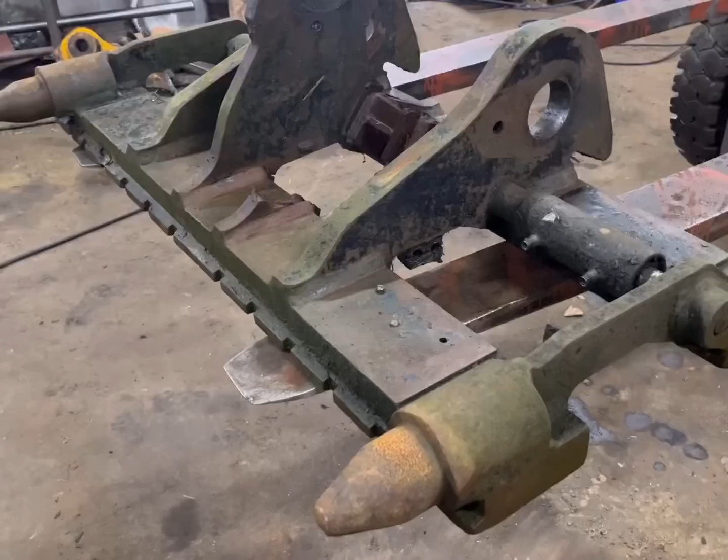Right, we're going to do a video on repairing this JCB pin and cone headstock. It's had the usual problems where the middle plates are broken out, so we're going to cut them off and what remains of that one, plasma some new ones out, weld them on and then line bore them through.

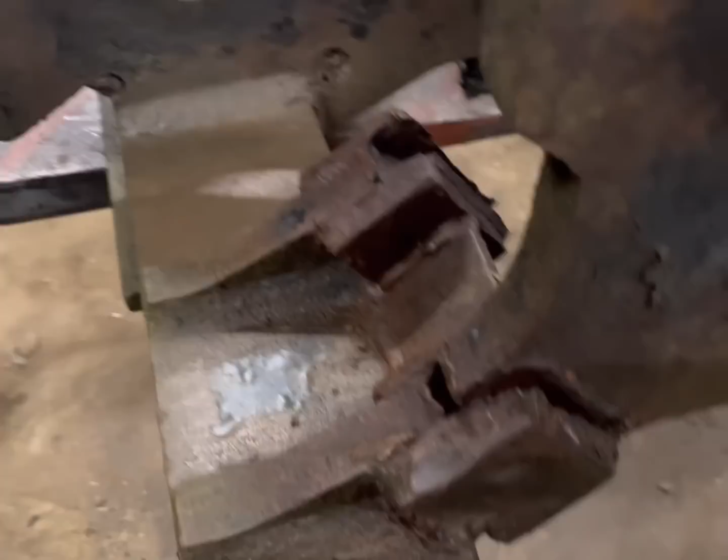So we'll start off by gouging the remains of them off. Someone's had a go at repairing it before, but not much success. So we'll gouge all that off, get it back down to smooth bare metal and then go from there. Right, I'm ready to gouge these off using 8mm carbon rods.

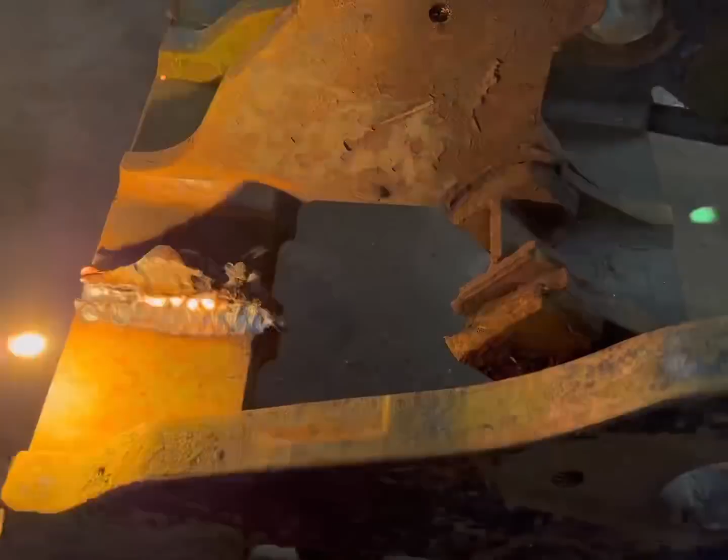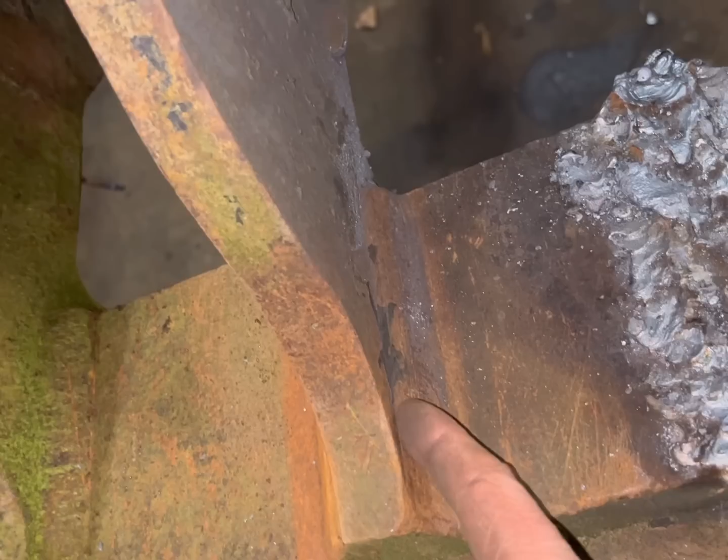Got that off. Because of how much weld prep these have on them, you have to dig in quite deep to find the separation line, so it is quite difficult. You just have to gouge plenty out.

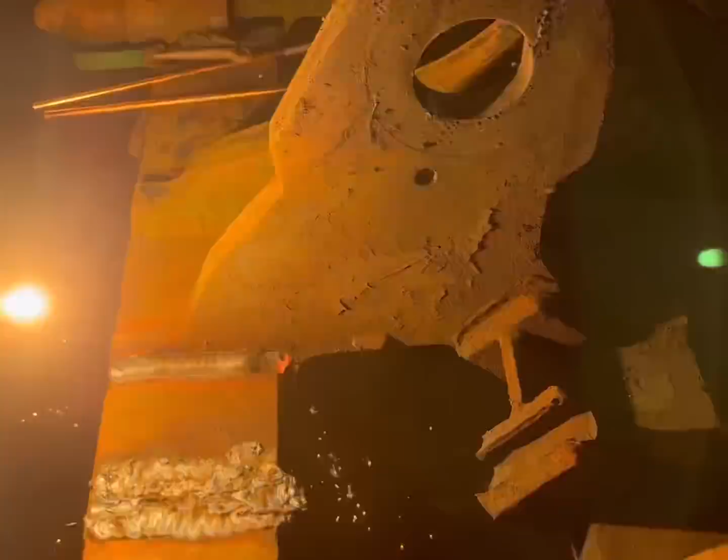You can see in there, found the separation mark now, so gouged enough out onto that side now.

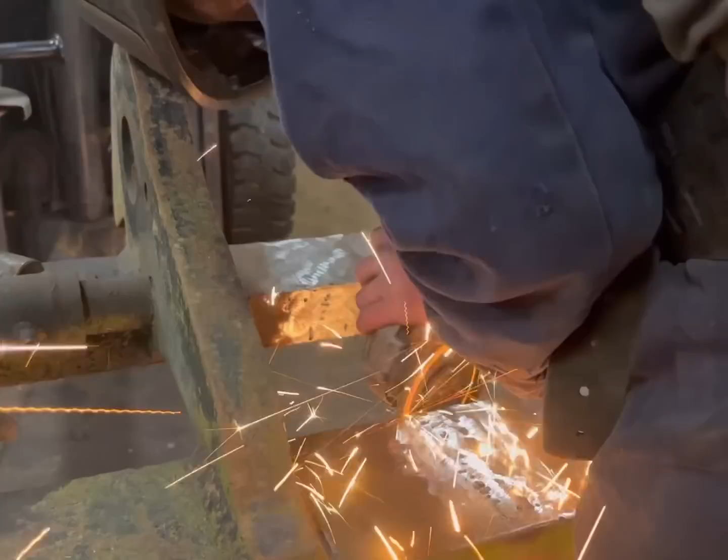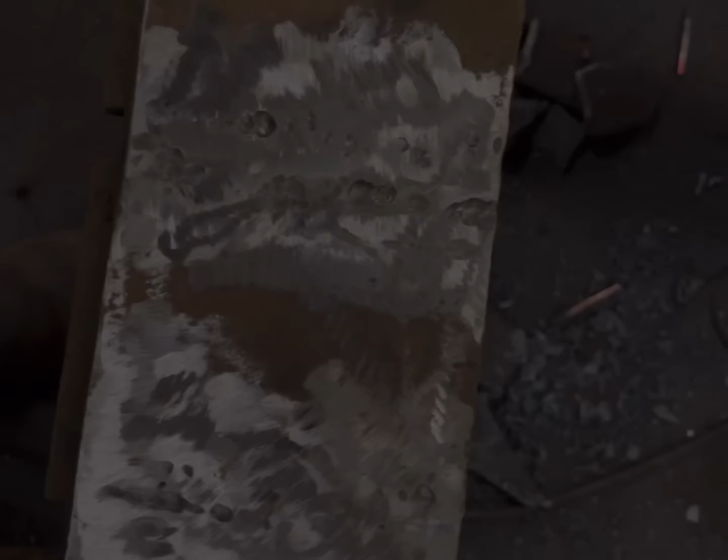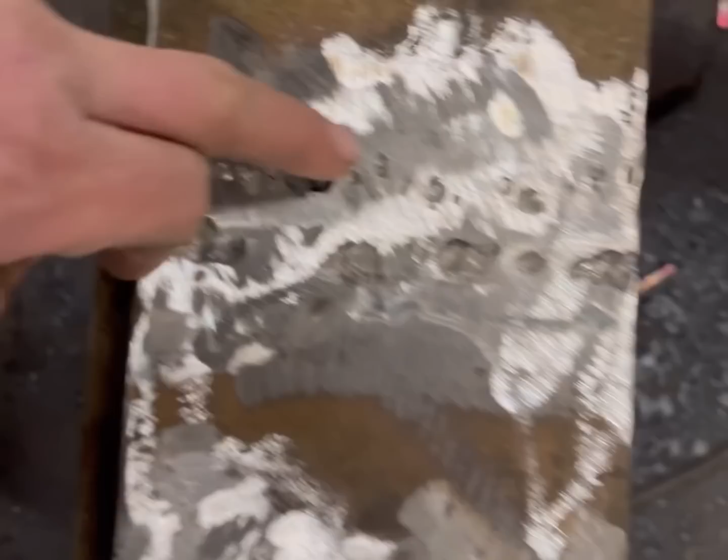I've got all them gouged off and cleaned up. What I've noticed, there's a crack. I'm not sure where that is as well. There and there. And there as well. So I'll get crack detection spray, spray it on, see what it says. Well, that's definitely a crack, is that? I think we'll have to gouge it out and then weld them back up again.

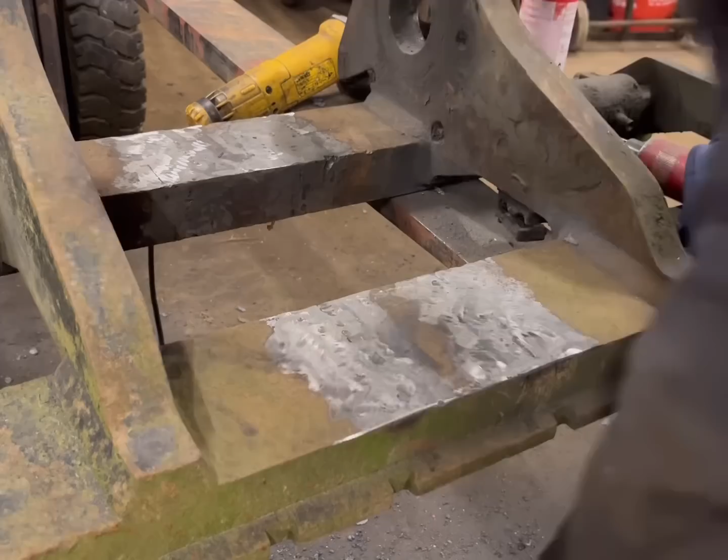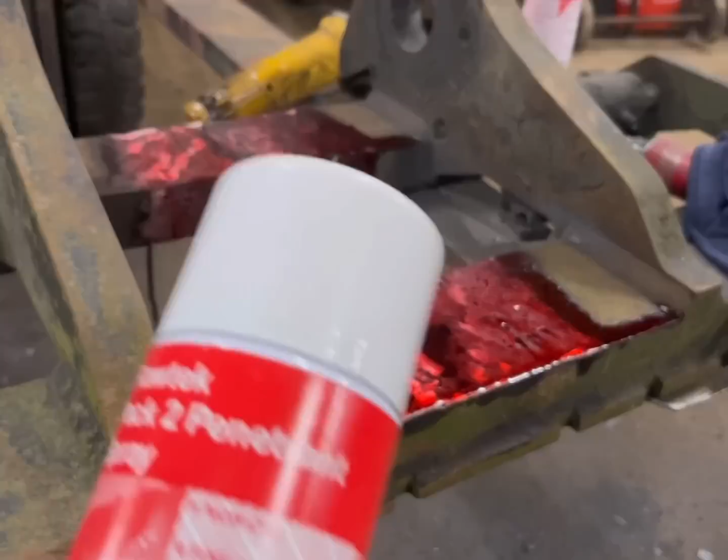Spray the penetrant on. Just have to give it 10 minutes now to seep in, and then we'll see if there's any cracks. Yeah, we've done the crack detection spray, and there's a crack there, some on there, so we'll have to gouge them out and then can weld them back up.

I've got it welded down to my bench. I've got it pre-stressed with a bit of plate under the middle, so when I weld it, it doesn't pull back and bow. Just wants to preheat now, and then I'll weld them cracks up.

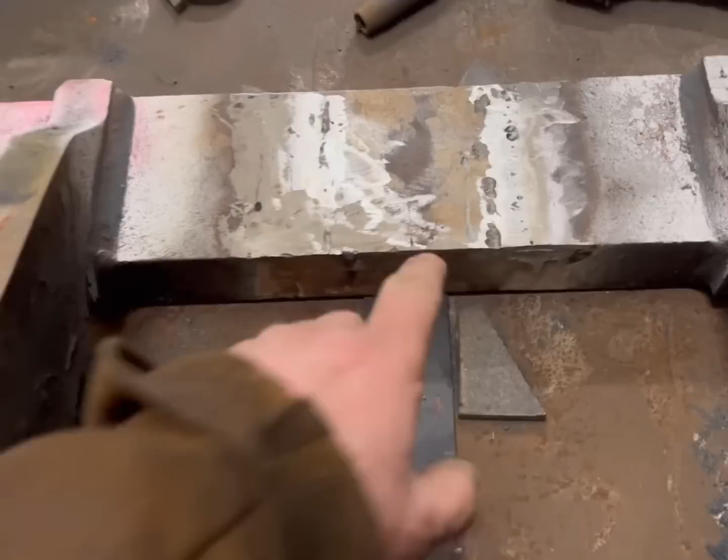I've got the cracks filled in. A few odd points where I've gouged in a bit too much with the gouger, but they'll fill in with weld when I weld the plates on. So I'll plasma the plates out now. Here's one I made earlier, as I say. I'm just going to alter this one a bit.

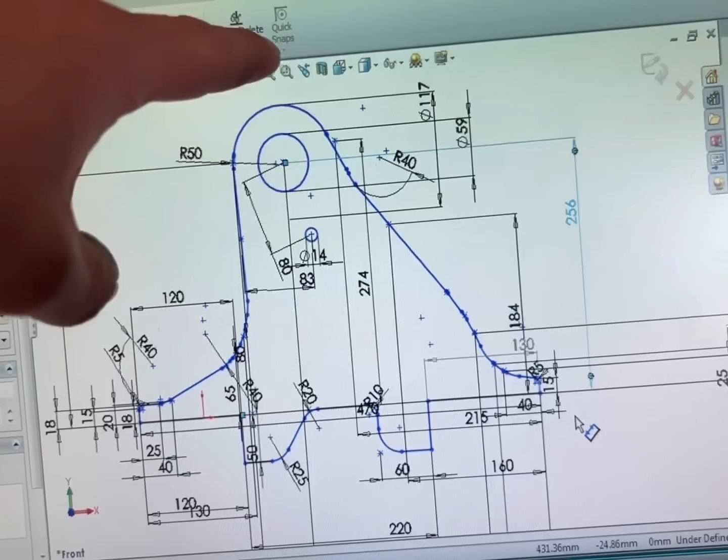For some reason, on the older JCBs, they have more metal around here, so I'm just going to alter this and give it a bigger radius around there, because they often tear out across there. And then I'm also going to alter this bottom. I'm going to make that straight across there, and then put a little hole in there for the pipes, because they rip out across there. So put a bit more extra metal in across the bottom.

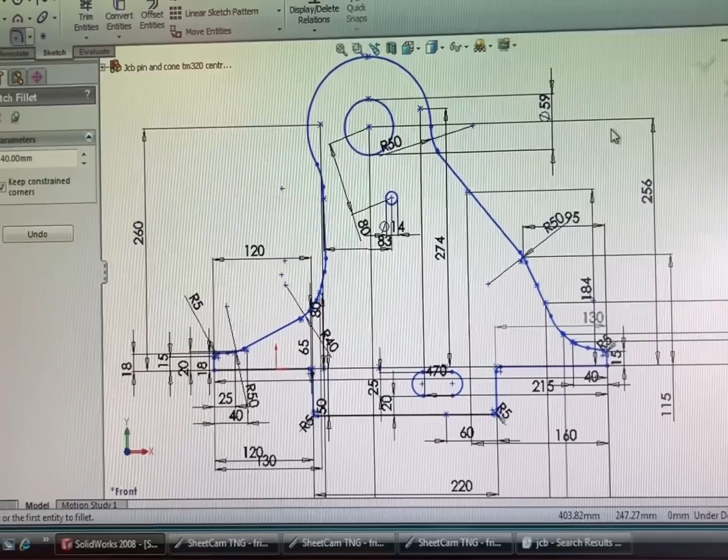That should help. Right, so I've altered that now. See, there's more metal around there than at the bottom there. Made it straight across there and put a hole for the pipes to go through. So I'll save that as a DXF, and then we'll open it in SheetCam, ready for the plasma.

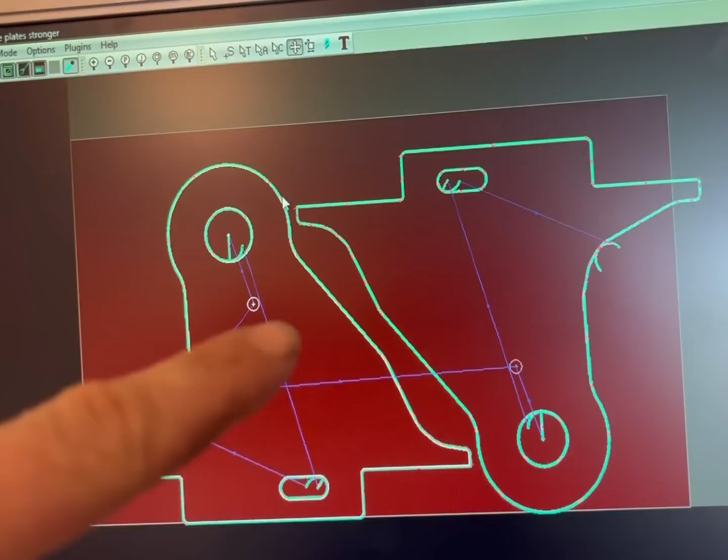Right, I've got that nested in SheetCam. Got a nice lead in and lead out on the holes. We'll have to pre-drill these because it won't pierce 25mm. And then that one is a bolt hole that needs drilling and tapping, so it's just going to put a pierce mark there just to mark the hole centres. So I'll save that onto USB stick, and then we'll go and get them cut out.

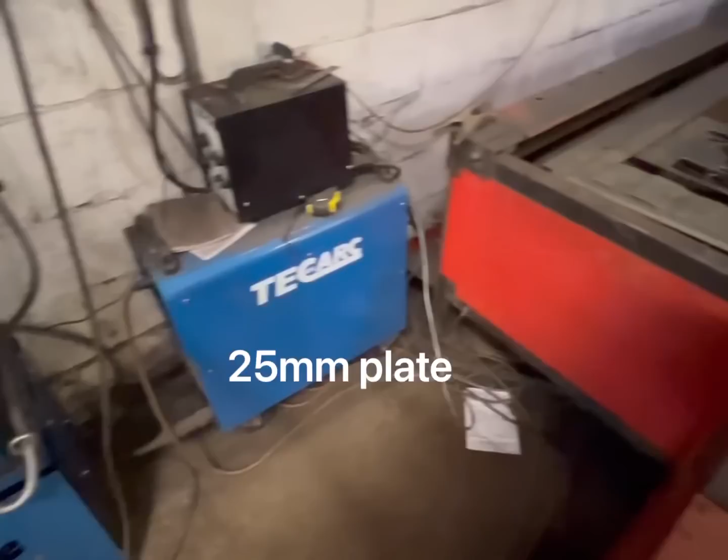I got my file loaded in. It's an old Burny 3 controller with an AlphaTech USB adapter. Got my plate on there ready. There's some I've cut out previously. And I'm using a Tecarc 95 amp plasma.

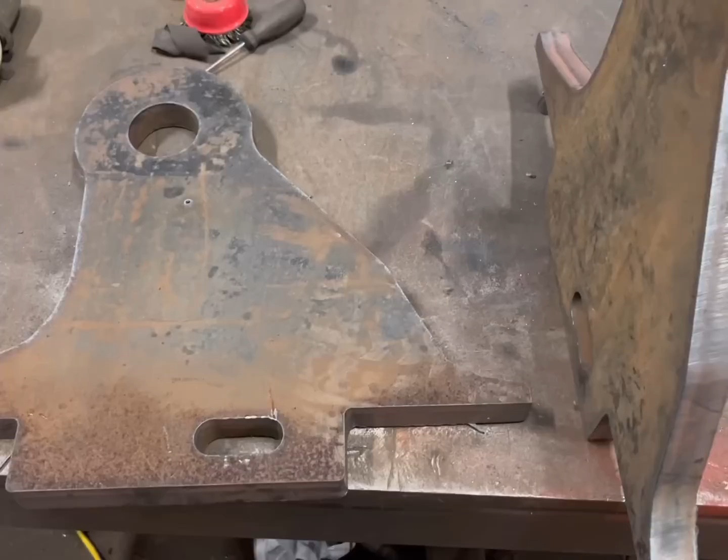So that's them cut out. Just want cleaning up a bit with the grinder. Reasonable cut quality, just a bit of slag to knock off. And then there's them holes there to drill, tap M16.

They also need weld prepping on them edges there, just that one, same on the other side. Want V-ing right back out. That's why it takes so much cutting off, because there's quite a lump of weld in there. So yeah, we'll do that.

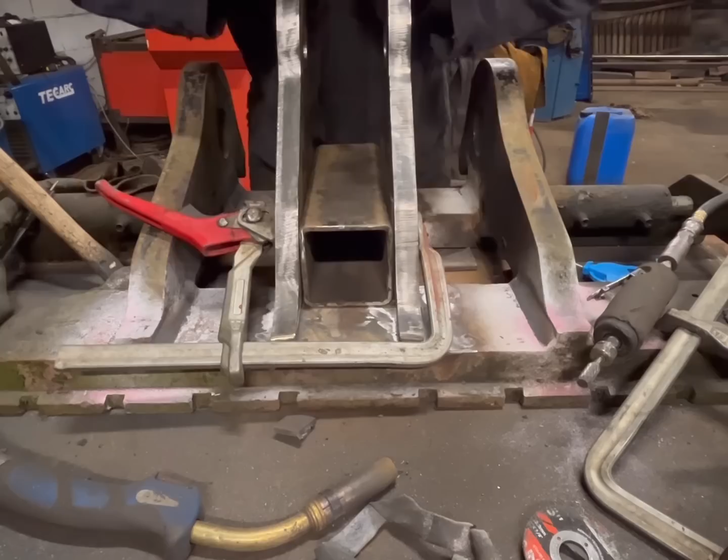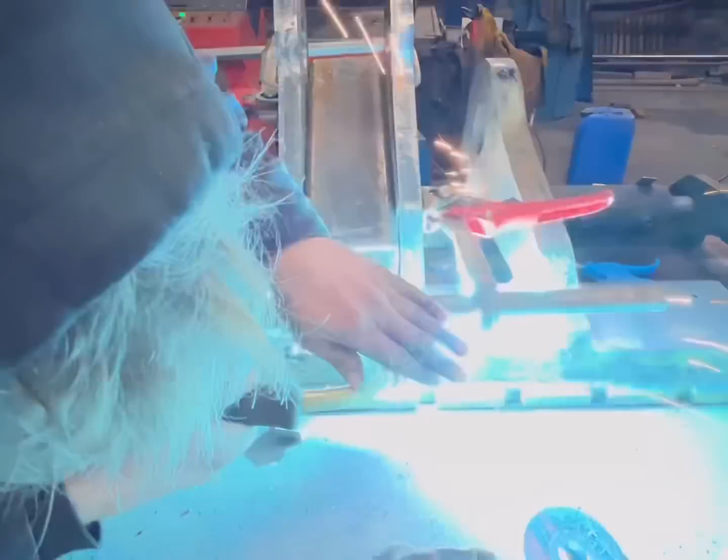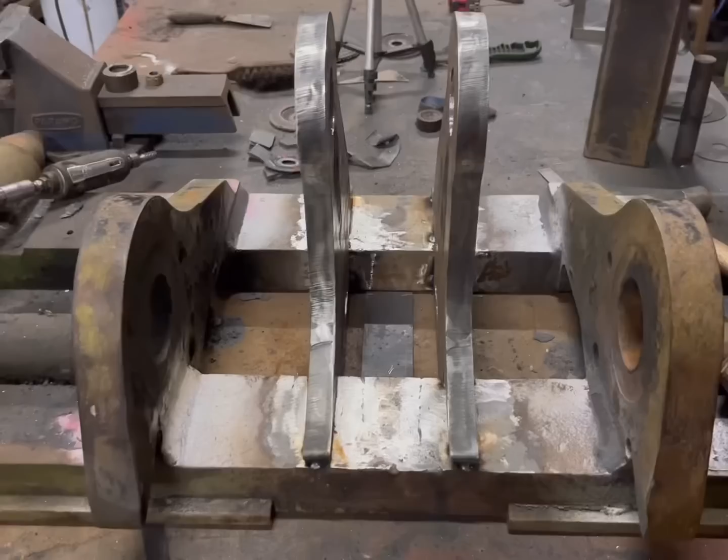I've got them tacked in there now. I purposely tacked them in a little bit lent over like that because I know when I uncut it from the bench it'll bow back a little bit, but that'll just nip that in. And I'm gonna cut a plate and press a plate to go in there, up there, across there and down there as well, so that'll

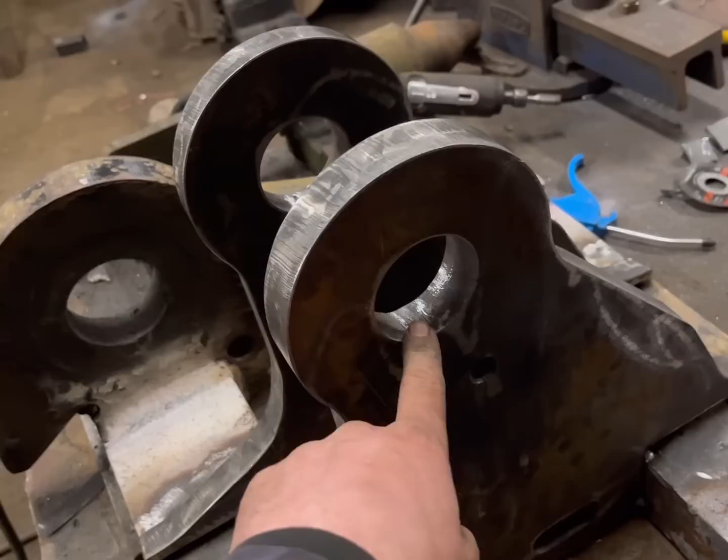keep the gap right. And I just need to tack a bit across there, stop it pulling in, and then we can weld it up more. Preheat it and then weld it up, and then after we've got it all welded up we can line bar that hole through. Purposely done that where that's 59mm, where the pin that goes through is 65mm, so there's plenty there to line bar out.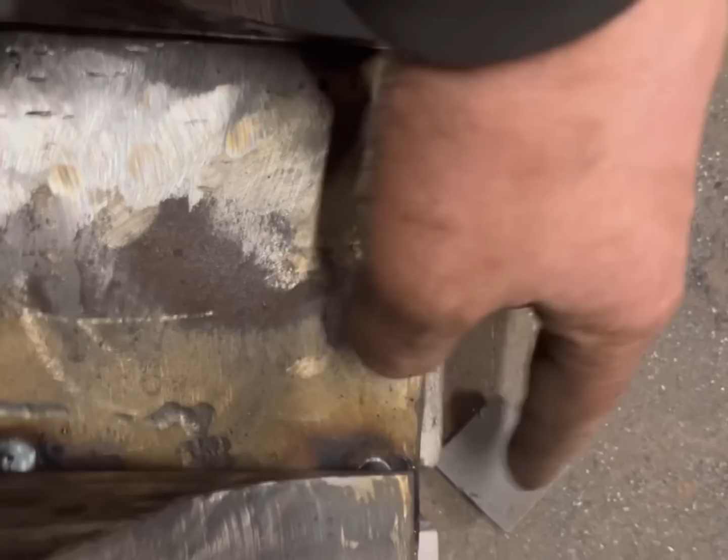Just going to tack some runoff plates on there as well, there and there, and then I've got somewhere to start on with the weld rather than starting on an edge.

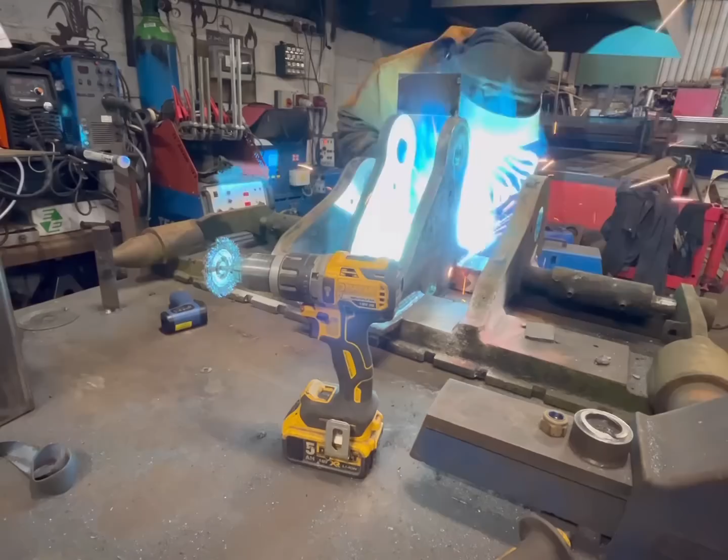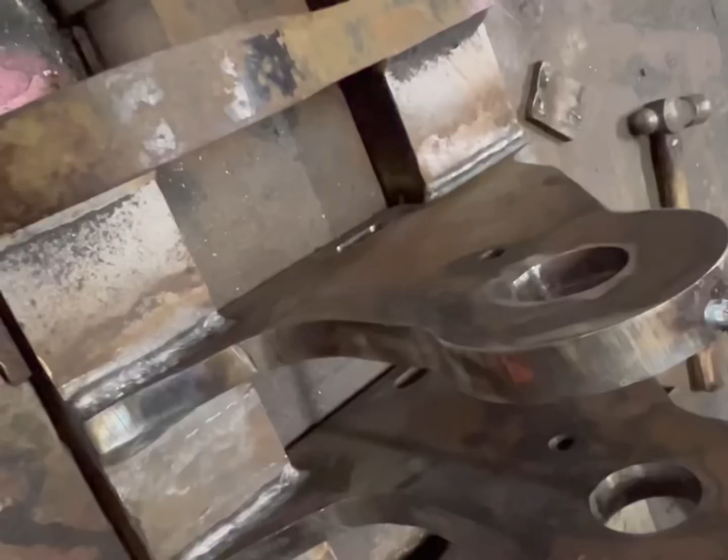Right, they're all welded on. Not my best looking welds, but they're good and strong. Burnt in nice. We'll just wait for it to cool down and then we'll take it off the bench. And we've got them welds to do, and then them welds to do. We'll have to have it right way up to do them, and then upside down to do them.

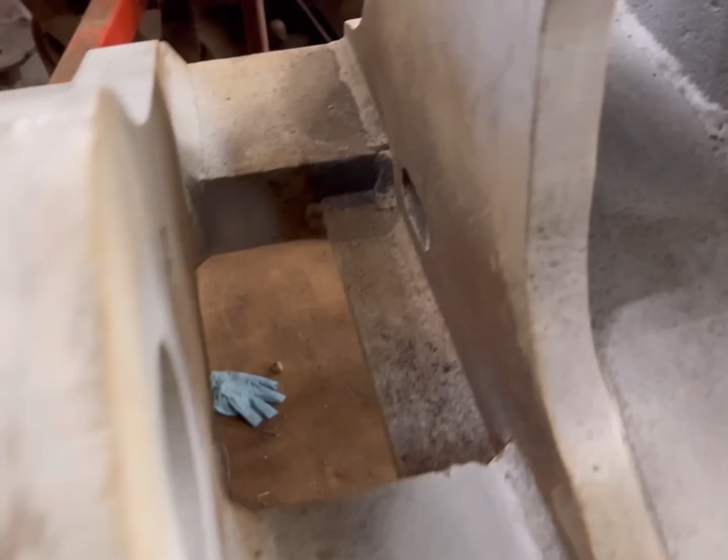I'll copy in this headstock. This is one, I think these are made by Cherry. These have an extra bit in there. I've never seen one rip across there when they've got that extra bit in, and they've got an extra plate across there as well, and they've got the bigger bits around there.

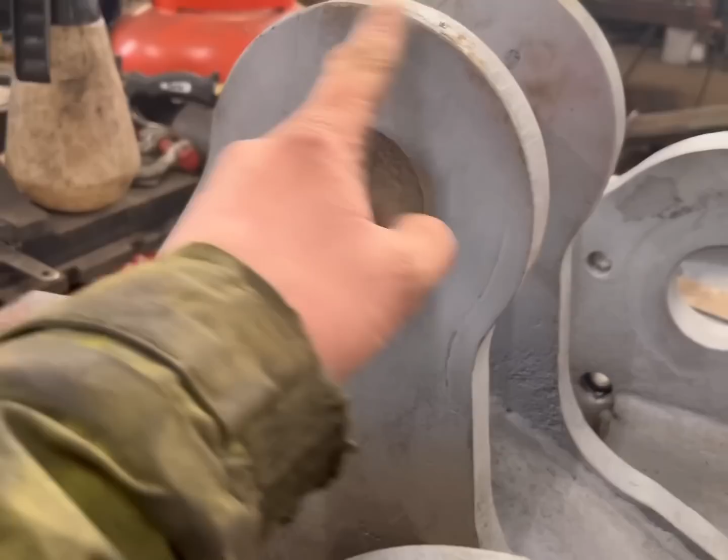I've got that bit of 8mm plasmed out and pressed. I'm going to weld that. Just going to go in there, weld that in. It'll just take some of the stress away from that weak point across there.

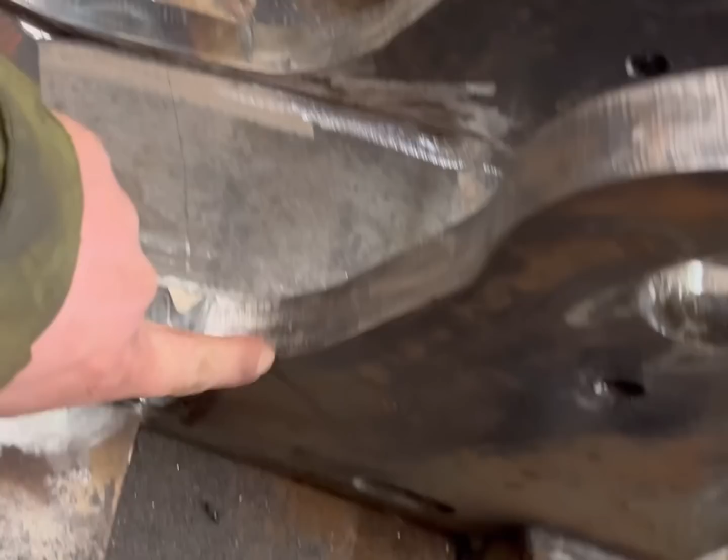That's all the welding done now. I've welded an extra plate in there, plasmed it out and pressed it to fit in there. I didn't video that because the video is getting a bit long and boring. And I've also put a plate in underneath. It goes from there across to there just to seal up that cavity, and just a bit of extra strength. Welded, it's got something to weld onto there.

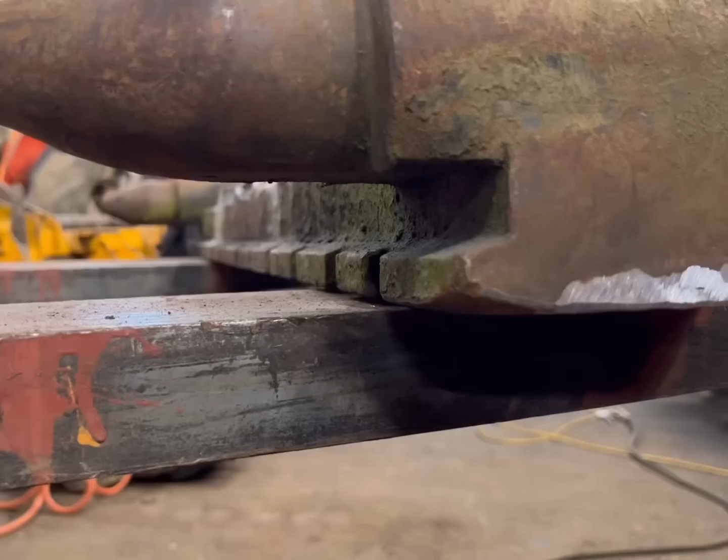So yeah, pre-stressing it has worked. It's nice and straight down there still, to see how much heat and weld has gone onto this side. So yeah, it's ready to line bar now. Pleased with that.

I'm going to do the line bar in part 2 because this video is already quite long and boring. So if you're interested, I'll see you in part 2.